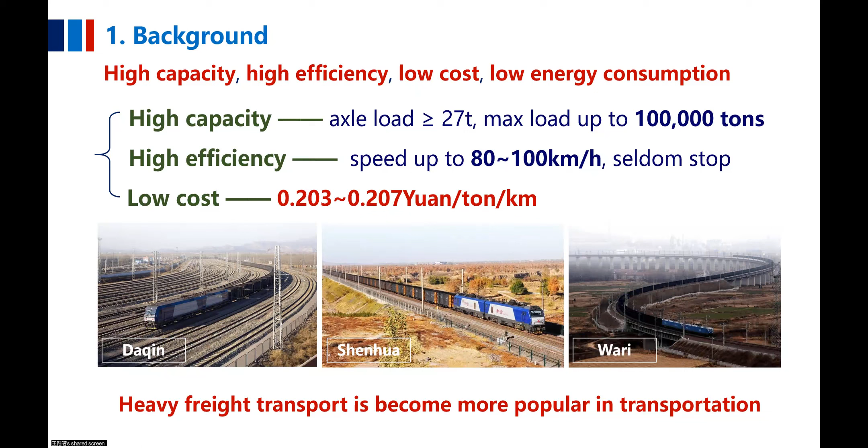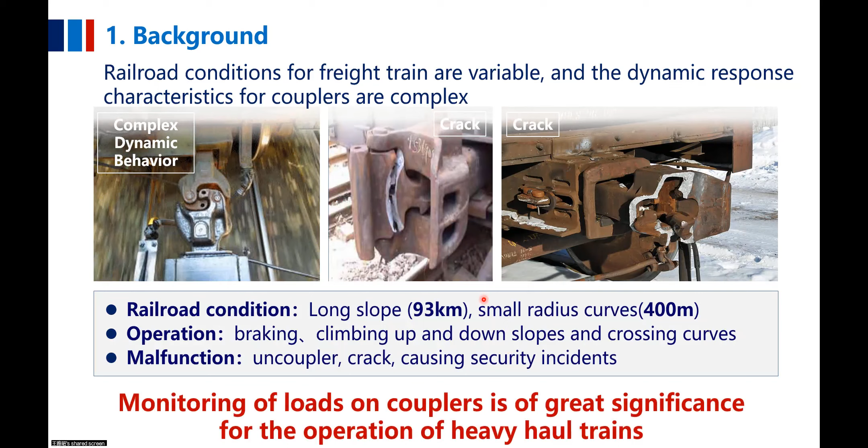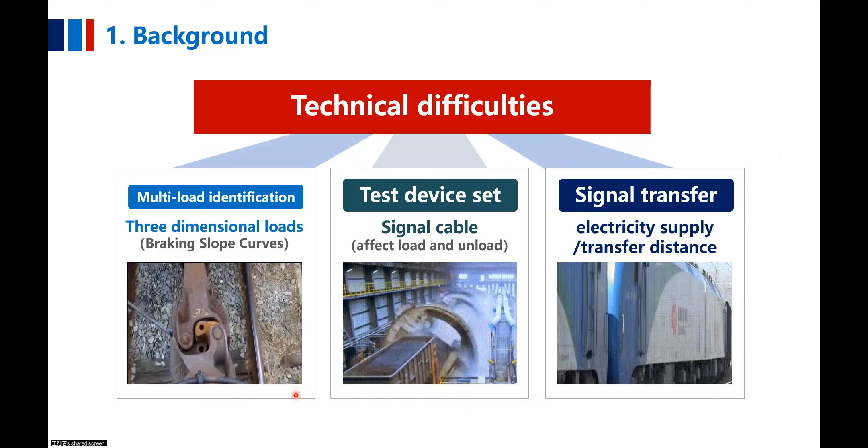At present, with the further increase of the load of heavy haul trains, the coupler receives a large load and the load action direction is complex in the process of train operation, especially in the process of starting, braking, and crossing curves. It is easy to break the coupler like the picture shows and cause major traffic accidents. At present, the existing force measuring couplers only pay attention to the longitudinal force in the process of train operation, ignoring the lateral force in the process of passing the curve and the vertical force in the process of going up and down the ramp. In addition, the use of wired monitoring is not conducive to train formation and loading or unloading of goods, while the use of wireless signal transmission needs to overcome the challenges of long transmission distance.

To solve the above issues, we propose a multiple load identification system for heavy trains using the LoRa wireless monitoring method. The work we have done can be divided into three parts. Firstly, the fault model of the coupler is theoretically analyzed by using the theory of classical material mechanics. The calculation relationship between the force received by the coupler and the surface strain of the coupler body is obtained, and the load identification coefficient matrix is obtained. Then we get the unknown coefficients in the load identification matrix through simulation calculation.

Then we designed a strain bridge method which can collect the force in three directions of the coupler, and self-temperature compensation is considered. And we developed the model machine and carried out the calibration test and the verification test. Finally, we designed a wireless signal collection and transformation system. I will explain each part separately next.

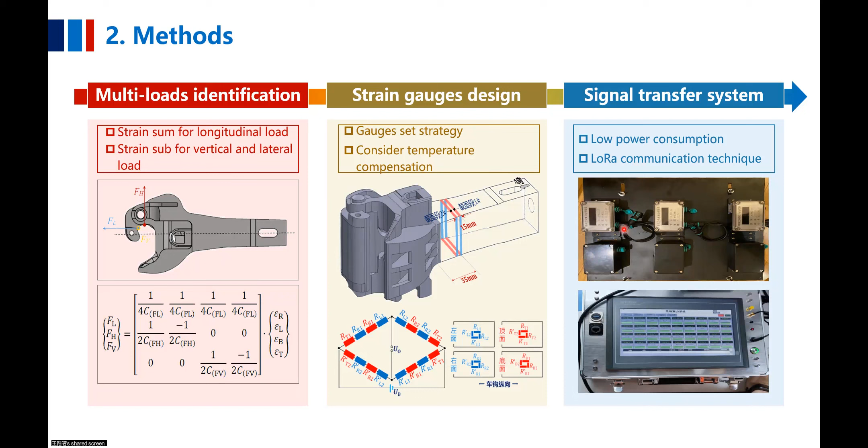The first part is the construction of the theoretical model. We have built two theoretical models. One is the longitudinal centripetal loading condition without considering the additional bending moment caused by longitudinal load. And when built, the theoretical model will mainly focus on the calculation relationship between the surface strain of the coupler body and the three-dimensional load received by the coupler. According to the theory of classical material mechanics, there is a linear relationship between strain and force.

Therefore, under the condition of longitudinal centripetal load, we assume three coefficients: CFL representing the relationship between the longitudinal load and the strain caused by the load, CFH representing the relationship between the strain caused by lateral force and lateral load, and CFV representing the relationship between the strain caused by vertical force and vertical load. After derivation, we get the load identification coefficient matrix composed of these three coefficients.

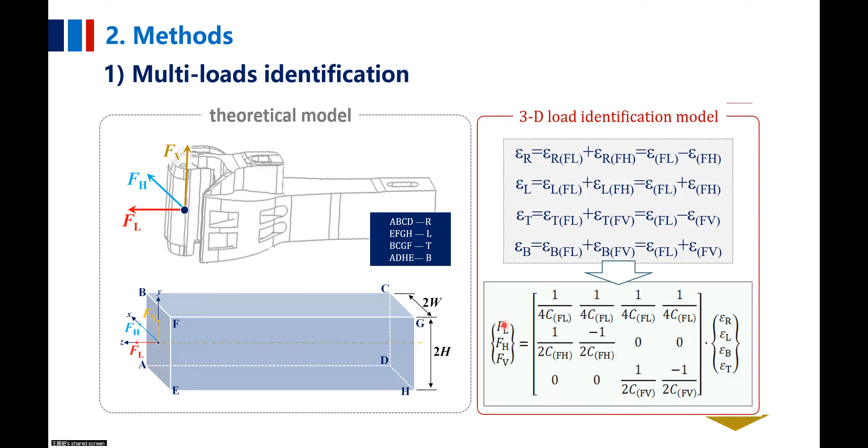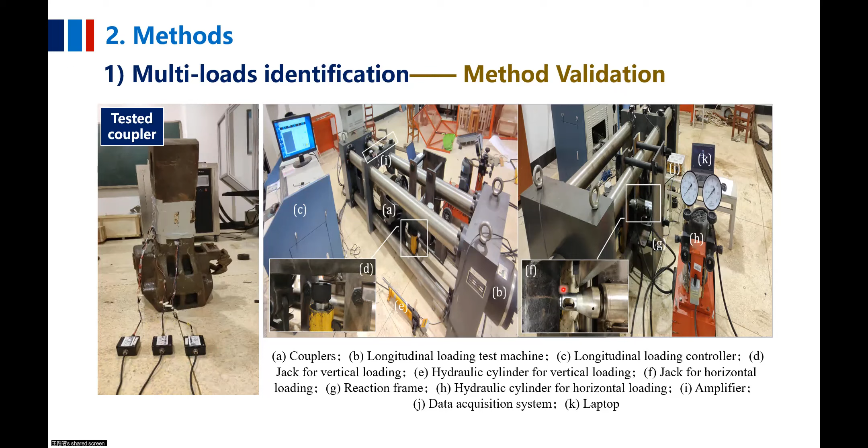This is a loading test machine we used to apply longitudinal load. We also used the two hydraulic loading machines to apply vertical load and lateral load respectively. We also designed a reaction frame to help us load the lateral force.

In order to obtain the coefficient in the load identification matrix, we carried out the calibration test, applied the longitudinal load from 100 kN to 500 kN to the coupler respectively, and then applied the lateral load and the vertical load from 10 kN to 50 kN to the coupler respectively, with the longitudinal load of 500 kN. The linear relationship between the load and the coupler body strain is obtained, and the coefficient in the load identification matrix is obtained by fitting the curve.

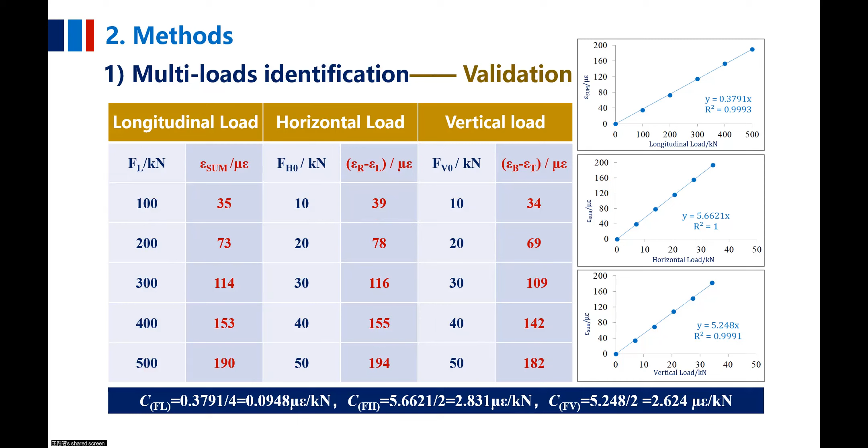And in order to verify the correctness of our load identification matrix through experiments, we also carried out random loading verification tests. We applied 10 groups of random loads to the coupler to obtain the surface strain of the coupler body. Then we substitute the identification strain into the established load identification matrix to calculate the load on the coupler, and compared the given load with the identified load. It is found that the identification error of the load identification matrix designed by us is less than 2 kN, and the identification effect meets the needs of engineering application.

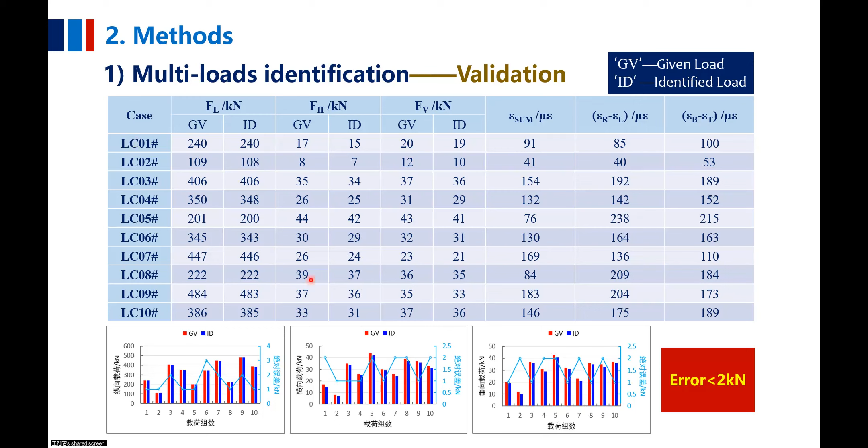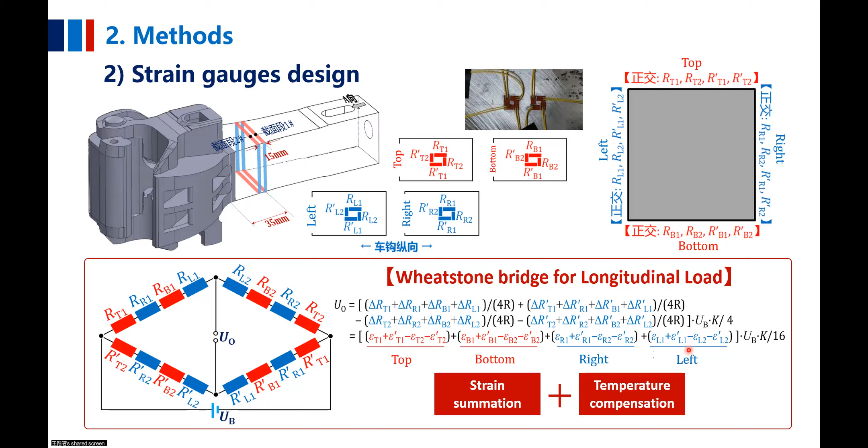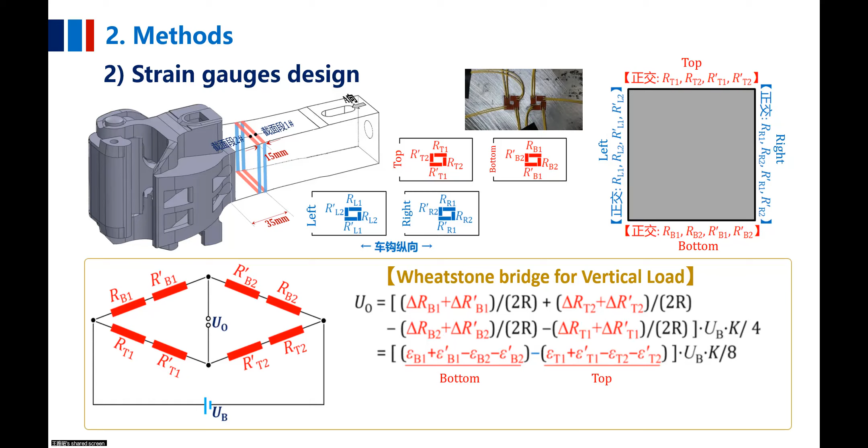These four items shown here represent the temperature self-compensation function of the top surface, bottom surface, right surface, and left surface respectively. This is the bridge combination used to identify the lateral load. These two items respectively represent the temperature self-compensation function on the left and the right surface. This is the bridge combination used to identify the vertical load. These two items respectively represent the temperature self-compensation function on the bottom surface and top surface.

For the strain bridge we designed, we verified the temperature self-compensation function. We used a high-power incandescent lamp to illuminate the coupler body surface strain gauge to simulate the uneven temperature of the four surfaces under sunlight. We collected the temperature with a temperature test paper and collected the strain output of the bridge with temperature compensation function with a data collector. In addition, in order to compare with the function of our bridge, we also put a bridge without temperature compensation on each of the surfaces.

From the result in the right figure, we can see that after the irradiation of the high-power incandescent lamp, the output voltage of the bridge without temperature self-compensation function, like this one, changes accordingly with the temperature. While the output voltage of the bridge with temperature self-compensation, the blue one, designed by us, is basically unchanged. After conversion, the zero drift strain output of the temperature compensation bridge is less than 12 microstrain. It is equivalent to a load identification error of less than 3 kilonewton.

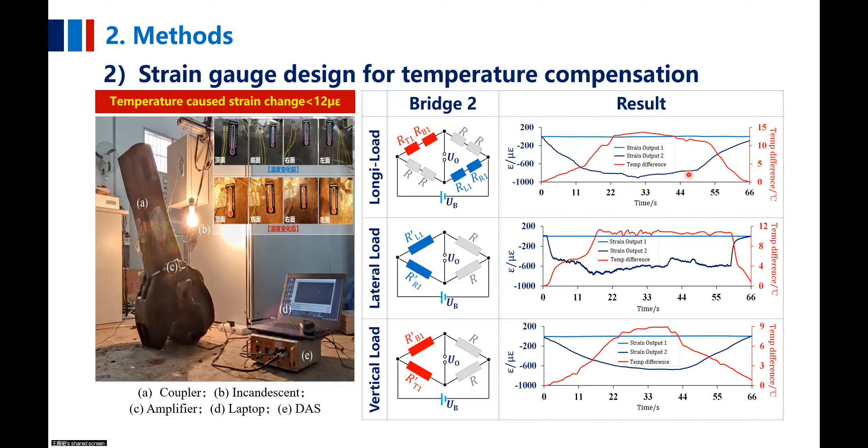I will introduce the signal transfer system in this part. First, let's look at the typical Chinese heavy haul train. Typically, the locomotives here use number 13 coupler. The open wagons are in groups of 3. Each group is connected by number 17 coupler, and the 3 wagons in each group are connected by the drawbar. In China, the length of a 20,000 ton train can reach more than 2,600 meters. Different dynamics are exhibited at different locations of the train.

Therefore, we designed the submodules here, arranged at the middle, at the head, and at the tail of the train. Each submodule consists of a force measuring coupler and a set of data acquisition and transmission devices. The acquisition frequency of the submodule is 166 Hz, and a flash memory card is used for data storage. Since there is no power supply in the open wagons, a battery is used to power the submodule.

The terminal here is placed in the driver's cab at the locomotive location and receives data from the submodule every 5 seconds, which can provide the driver with coupler force information to adjust their operation. And because there is no power supply in the wagons, as we said before, we also consider using wind power or solar power to charge the submodule in the future.

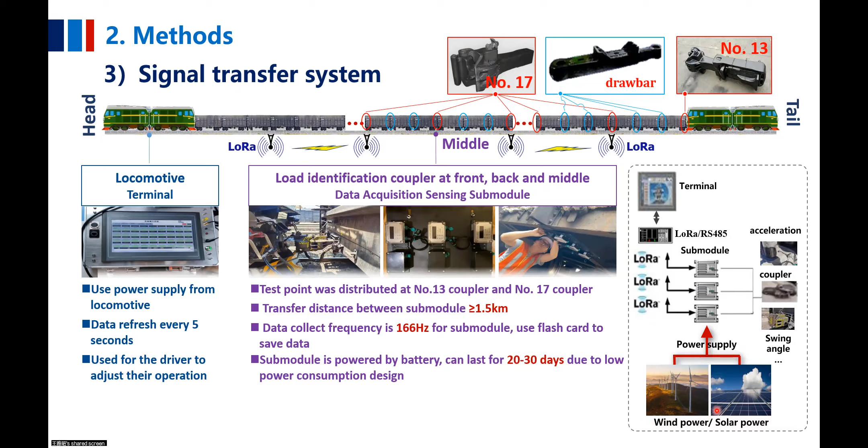The third part is the prospect of our research. The first prospect is that we would like to conduct long-term tests of coupler load on heavy haul trains. Through the multivariate coupler load tracking and monitoring of up and down ramps, small radius curves, and other working conditions, on the one hand, it can provide traceable data for accidents such as uncoupling and coupler breakage during transportation, and provide support for dynamic analysis.

On the other hand, real-time monitoring of the coupler load can provide a basis for asynchronous control of the air brake of vehicles in large groupings, and can also provide a load spectrum for the fatigue damage assessment of the coupler structure and the development of cracks and breakage.

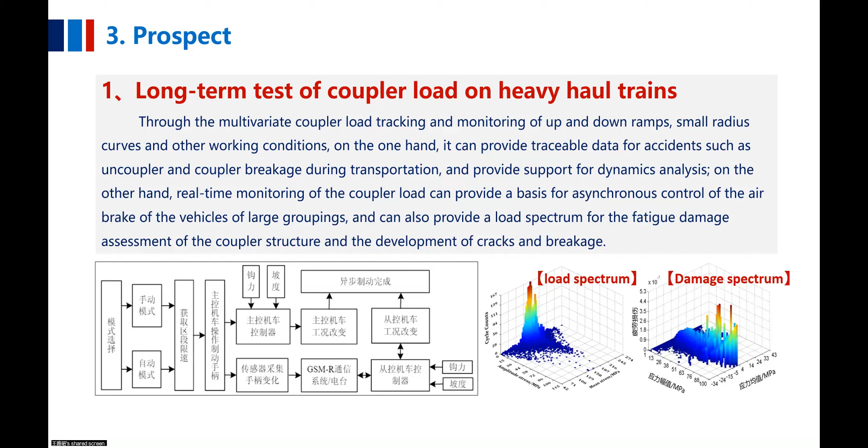Second is to apply the method to other types of trains. Intercity trains and mainline high-speed trains use tight lock couplers, unlike the couplers used for freight trains. The tight lock couplers do not allow two couplers to produce relative displacement in the vertical direction. By laying the differential strain gauges at the key stress positions of the tight lock couplers and performing bridge design, the multivariate load decoupling identification of the tight lock couplers can be realized, and the dynamic analysis can be done.